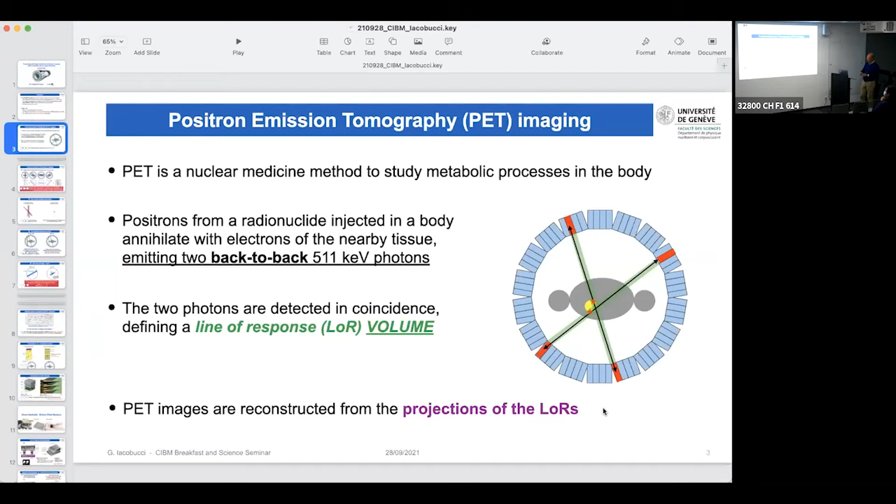So the images on the PET are reconstructed by the projections of the line of response. So this is how it works. You take all the lines of response that go in one direction, you make a projection, then you change this direction, you make all the projections, you superimpose all of them, and you see the image. You can see there is a darker spot there. Like this, it's easy to understand. But if you have many spots that you want to image, of course, everything will be very complicated.

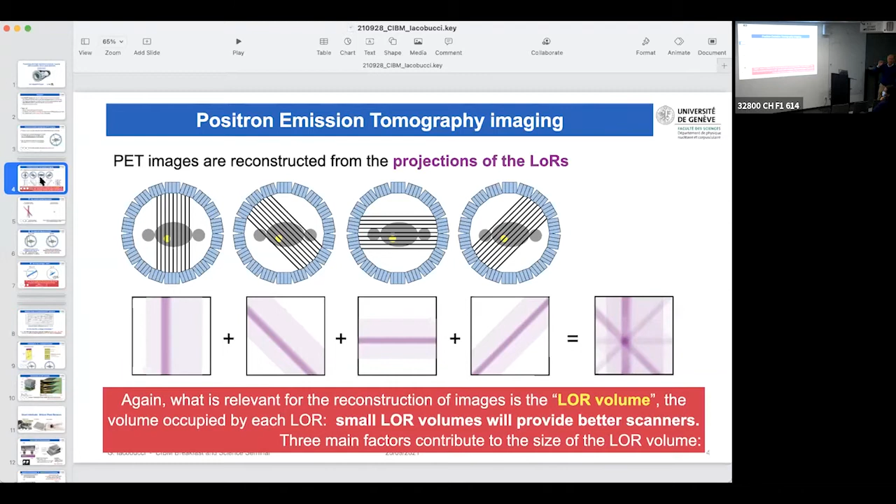There are several factors that contribute to the volume of the line of response, and I will concentrate on three of them. First of all is the detector spatial resolution. So these are movies. I don't know if you can see them. Let's see. Yes. I'm sorry about the latency of the network. I don't know what to do with it.

The idea that I had in making these movies is you see on the left two sources, one emitting two lines of response in red, and the second source that emits the two lines of response in blue. If the granularity of your detector, the size of your detector, is large, you will not only see where they cross, but they will also cross somewhere else. Even if you take all the projections in space, they will cross somewhere else, which means that you will have a lot of ghost images, a lot of artifacts. And there is not much you can do with it.

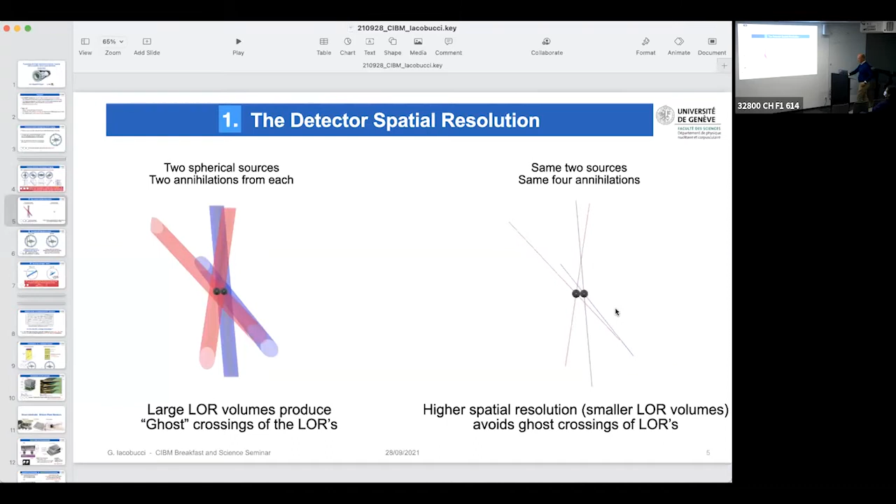On the other hand, if your line of response is thin as a hair, 100 microns, then they will touch only in the points where the emission happened. So this is the first thing, to have a very high resolution. Second thing is what we call the depth of interaction.

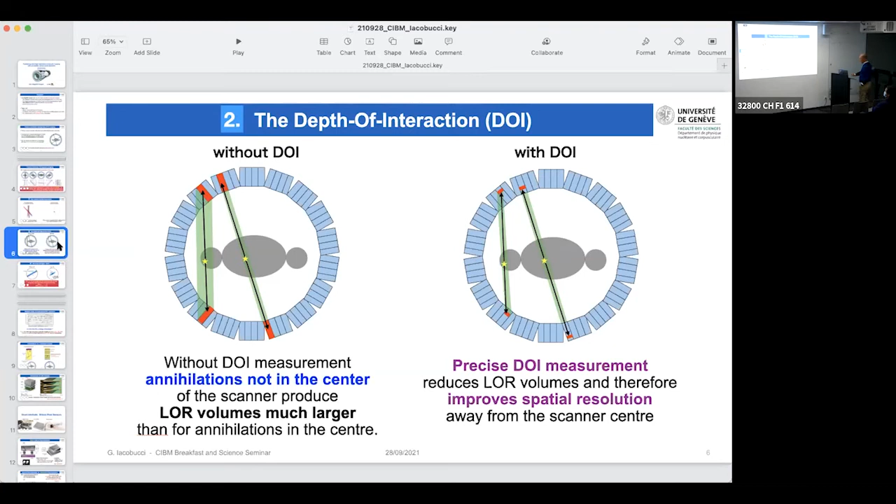Third thing that everybody knows is the time of flight. Time of flight does the same thing. You measure the arrival time on the top and on the bottom detector. You do the difference, and because of this difference in time of flight, you know with a certain precision where the annihilation happens along the line of response of the two photons. This is another way to restrict the volume of the line of response.

Now, my question is: is this the time for a change of paradigm? Can we do something that is drastically different from what is done so far? Of course, PET scanners work very well. Over 40 years, they evolved a lot. They are much, much better than before. But the method is always the same. These are crystals. The photon arrives, you have scintillation light, you measure that. You can do a lot with it.

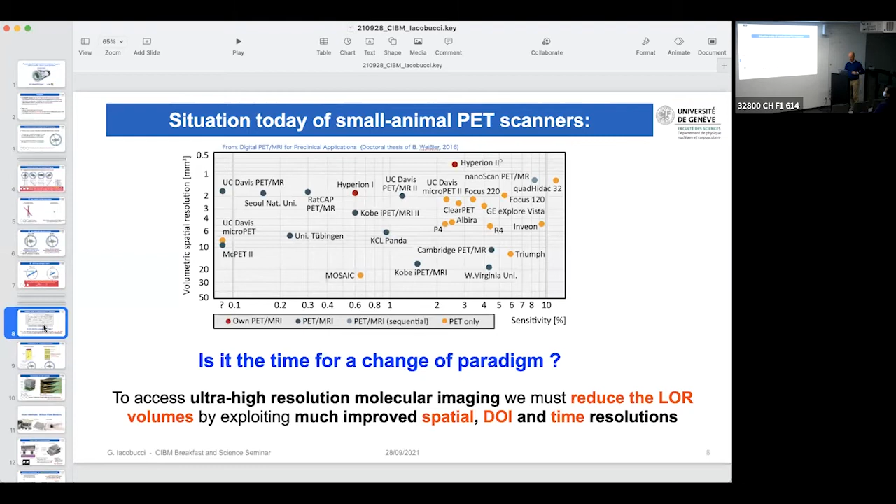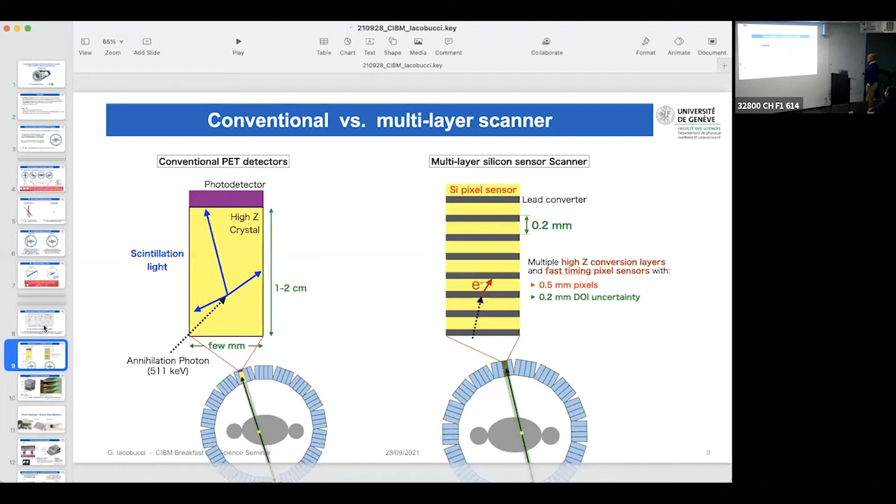So I changed the slide, but I don't see it on the screen. Here it is.

So this is the idea, as you see here on the right. You have a photon that will traverse a multi-layer of, let's say, 60 silicon detectors with a pixel pitch of 100 microns, extremely precise in the transversal plane, extremely precise in the longitudinal direction of the photon. So the depth of interaction we can measure very, very well. And this scanner should not suffer worse resolution on the sides when you are away from the center of the scanner. This is the limit of DOI measurement.

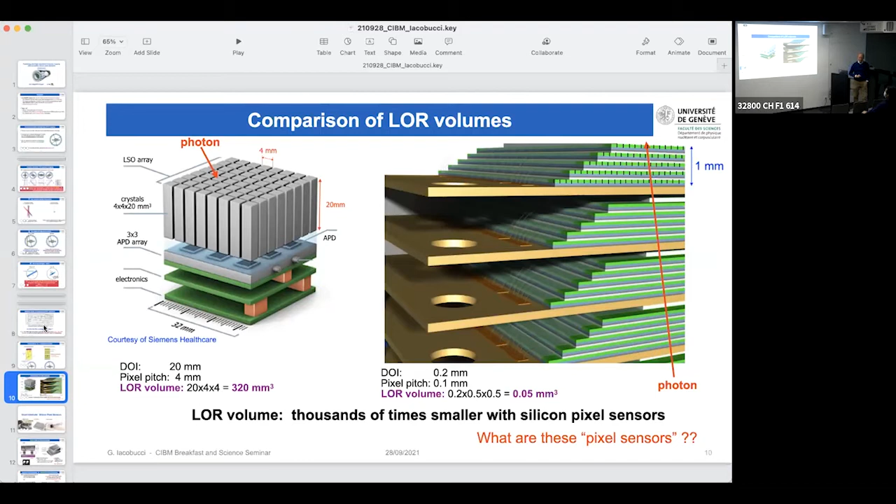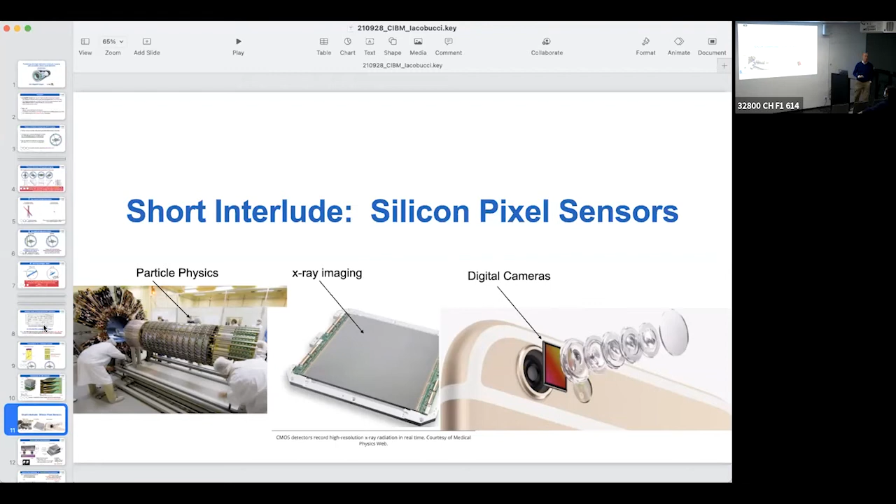You use them with your mobile phone. They are inside any camera and mobile phone. Before, CCDs were used, which were this kind of detector. Now we use CMOS pixel detectors, exactly what we are going to discuss today. So there are essentially two types of them. The first one, sorry, there are animations here, but it doesn't matter, we do it without animation. What do we call a hybrid silicon detector? What is a hybrid silicon detector?

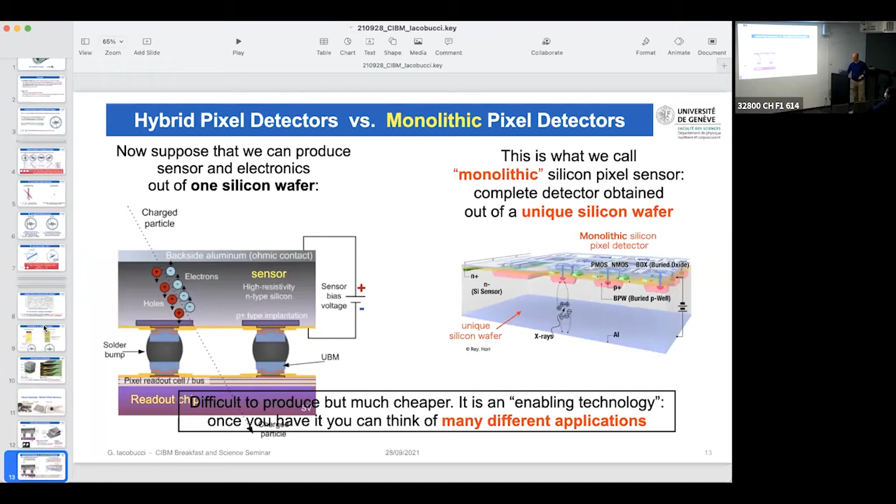Okay, so in Geneva, there is a tradition that I found when I arrived 10 years ago, a tradition with silicon detectors. There was already a very nice clean room with equipment. When I arrived in Geneva, I knew nothing about silicon detectors. I said, this is very nice, this is going in my new department. I do not want to cancel everything that has been done for 15 years before me. I want to continue that. So I continued the tradition in Geneva, but I wanted to innovate a lot.

So as soon as I felt confident, I started R&D projects on monolithic, because before there were only hybrids; monolithic did not exist. With other colleagues, we started to discuss this. The aim of the R&D that I launched in Geneva 6 years ago was first to develop and produce monolithic pixel detectors, but in particular to achieve a time resolution well below 1 nanosecond. The monolithic pixel chips used in ATLAS and CMS have a resolution of, let's say, 5 nanoseconds. I said we should get 50 times better than that, at least. So my goal was 100 picoseconds. As I will show you, we managed to do much better than that.

So with this in mind, we launched the first project, an SNF Sinergia between us, the HUG, and the University of Bern. The colleagues were Michele Weber from Bern and Osman Ratib from the HUG, whom I'm sure several of you know. This was the team at the time.

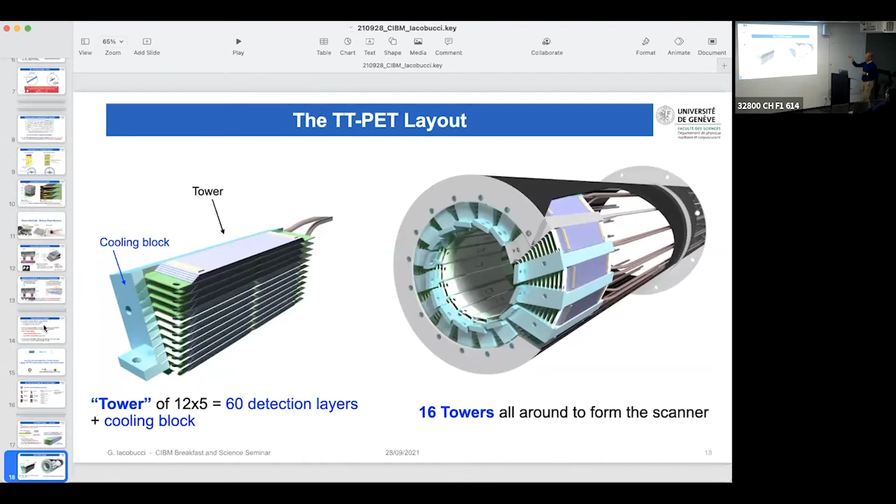Then what we do, these are wedges. We make 16 of them. We put them all around the small animal. And you see on the right what we want to achieve. This is the idea of the scanner.

Now, the performance of this. I'm still talking about the old Sinergia project, not the one that we have now active with Martin and Michael. This is the old Sinergia project that I'm illustrating to you because the principle more or less is the same.

So the performance of that, we have simulated our scanner that we call the thin time-of-flight PET scanner or TT PET scanner. We simulated it and the phantoms in Geant4 that allows a very detailed multi-particle physics, we call a full simulation of the processes and the detector. And we have studied the sensitivity, the coincidence rate, the spatial resolution, the background contamination, according to the NEMA standards. And I want to show very briefly this to you.

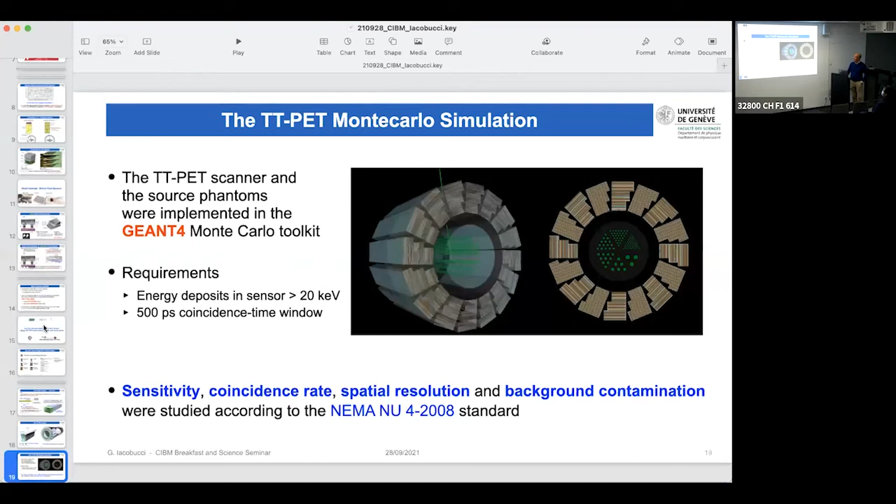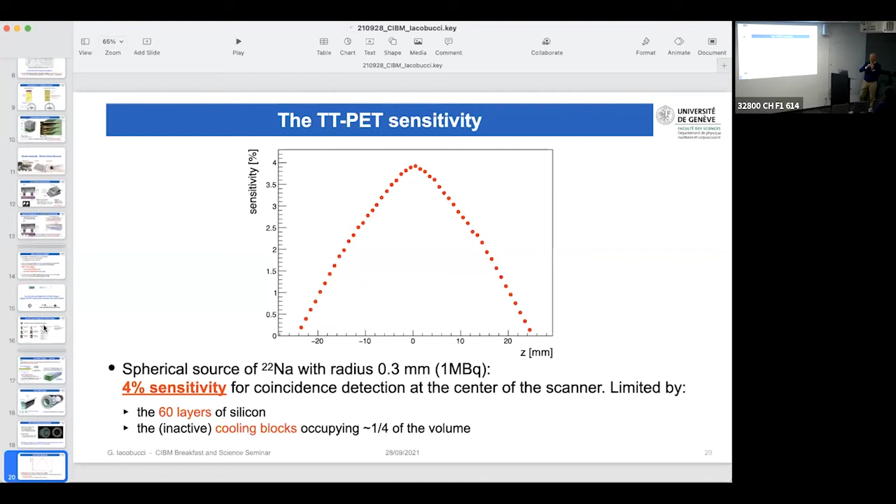So first of all, new slide. First of all, is the sensitivity. Here it is. So at the center of the scanner, according to the NEMA prescriptions, we measure 4% sensitivity, which is not bad. This is limited by the fact that we have 60 layers. If we will put 100 layers, we will have more, of course, and so on. And it's also limited by these cooling blocks that are in the inactive material, so they create regions where we are unable to measure.

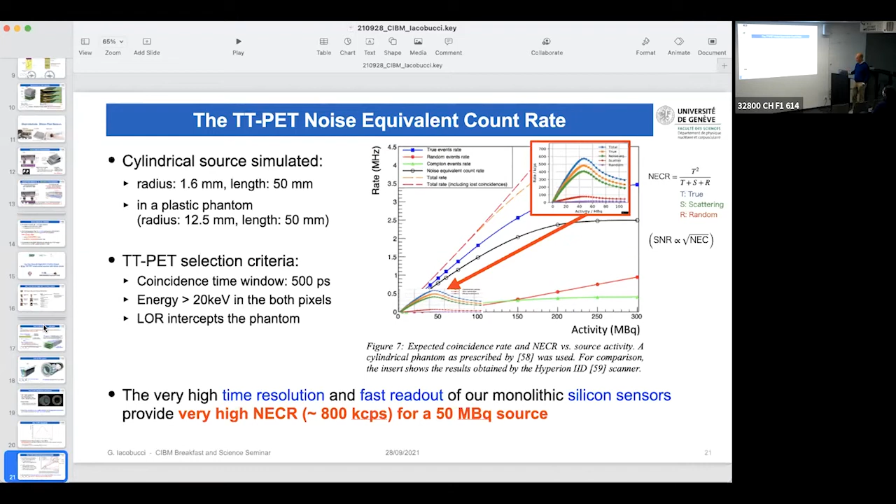Why this? Because silicon sensors are very fast. Our readout electronics is very fast. So this is why we can really work at very high rate, very high activity with high efficiency. Then we made the reconstruction.

You see on the left, the truth, the Monte Carlo truth, simulated the Derenzo phantom. Note the rod diameters. We go here down to 0.5 millimeter. Typically, the smaller rods that you see in the Derenzo phantom are 2 millimeters, in some cases 1 millimeter. Here it's 0.5. So we made a first reconstruction, non-iterative filtered back projection, and you see that without the time of flight information and with the time of flight information, we see enough. We see essentially all the structures, also 0.5.

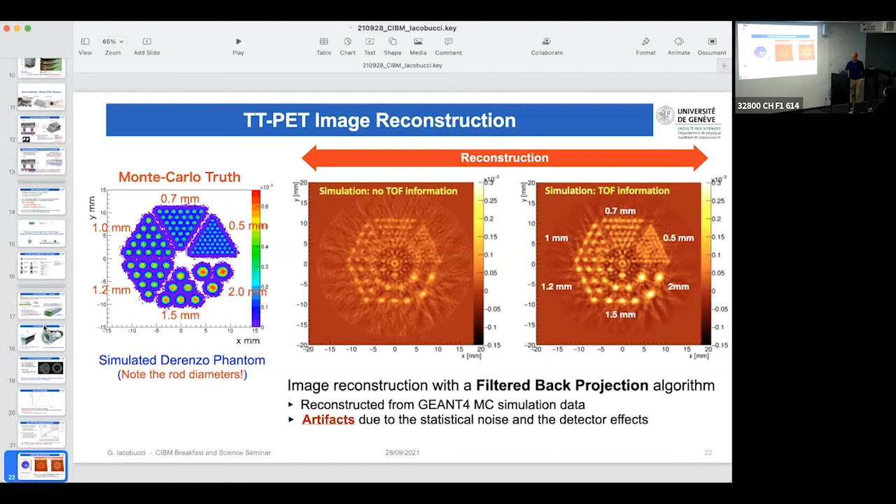But as you know, filtered back projection is non-iterative. It creates artifacts that you see here at the center of these images. So we were not happy. And with Emanuele Piccini, who is now working here at EPFL, and Daiki Ayakawa, my PhD student, they did set up an iterative algorithm.

Now, in this table, you see the results for the point spread function. You see several very interesting things. You see that the resolution, full width at half maximum in millimeters in the radial, tangential, and axial direction, is essentially half a millimeter, which is already very good. It's already a big jump with respect to what is achieved by conventional scanners.

And the other thing that you should notice is that when you move away from the center of the scanner, you see X position 0, 5, 10, 15 millimeters, it does not change. That is exactly what I told you is the virtue of very precise depth of interaction. So we have many layers, we can measure depth of interaction very well. So our resolution does not degrade when we move away from the center of the scanner, as we wanted.

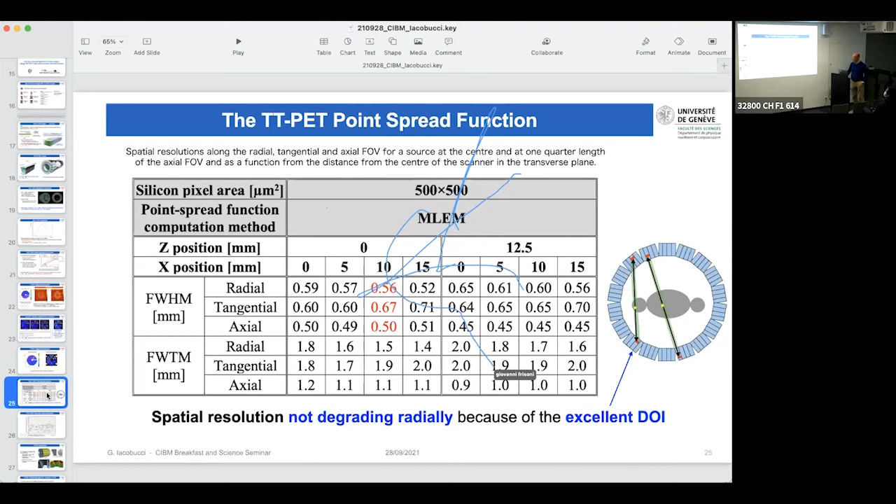Giovanni Frisoni is writing on the screen. Good morning, Giovanni. Apologies.

Okay, where is our scanner now in the diagram that I showed you before, the volumetric spatial resolution versus the sensitivity? It is here. As you see, we have 4% sensitivity, but we have a volumetric resolution that is already 5-6 times better than the best conventional small animal PET scanner. So this is already very satisfactory.

So I see that people continue to write on the screen.

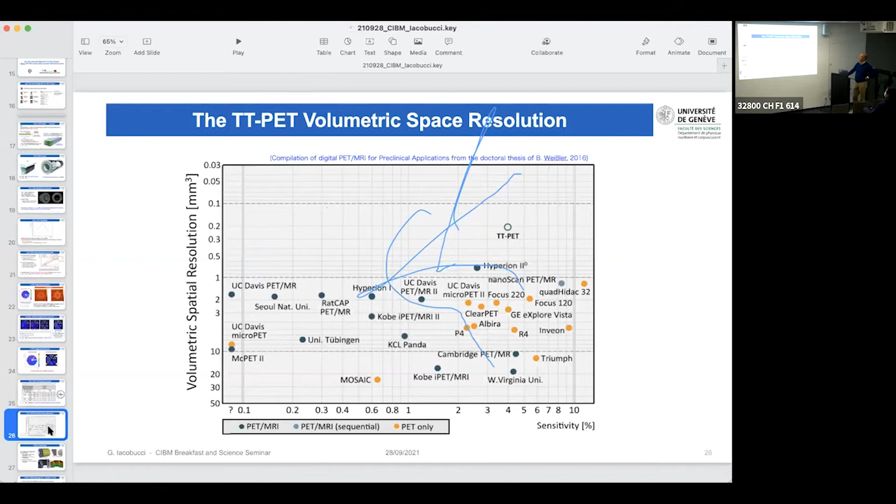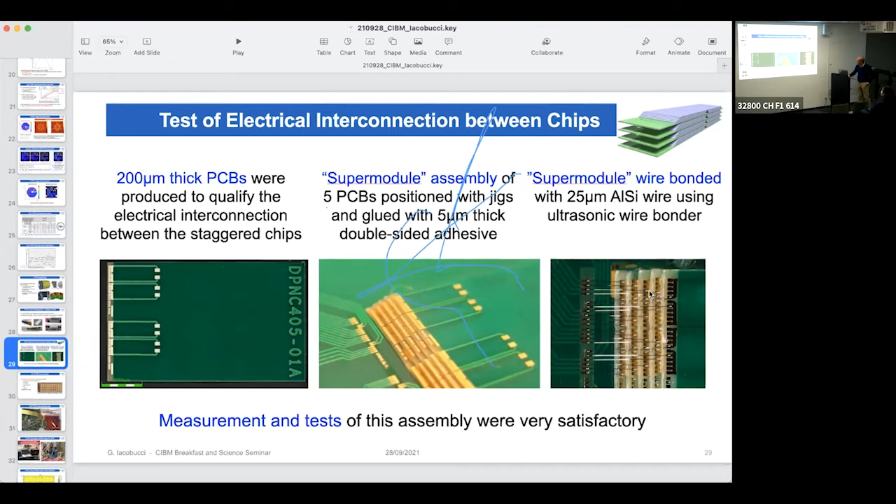Okay, so we made all the engineering. I think I'm late, so I will go very quickly on the engineering. So we made all the engineering of the scanner. We tested everything. I just show you the image. You see, we made a test of this staggered wire bonding. I'm not sure you can see here, but there are the wire bonds on this test sample here on the right. And then we made the prototype chip.

The prototype chip had 3 matrices of 3 times 10 pixels with a pitch of 500 microns. We decided not to go with very small pixels because of power. The more pixels you have, the more amplifiers you need, the more power you need. We had a budget of 300 watts for the entire scanner, so we had to stop at this size.

Why this? Because we wanted to exploit time of flight. Our electronics we developed in Geneva is very, very fast, so we can run a detector at 30 picoseconds time resolution. We wanted to use this. But if you want a very high time resolution, you also need a lot of power, which means that you cannot allow yourself too small pixels, because it would be too many channels. Okay?

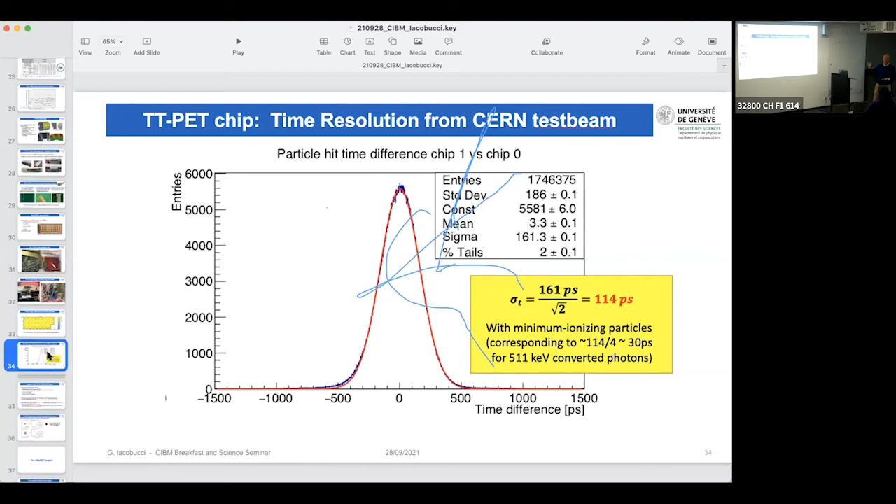That means that in the case of 511 keV photons that you want to measure in the PET scanner, the electrons that you convert out of this photon at that energy will produce much higher ionization. There's about a factor of 4. So the goal was achieved. Okay? So we were very happy about this.

So this was then the basis of the second Sinergia project that we launched and got approved, Martin, Michael, and myself. So we used all this. We have demonstrated we can do it. Then we sent this second funding request to SNF, in which we show that we can do much better than this. I will show you why. Because what we realized is that if we give up the 30 picosecond time resolution, I go directly to the results that I want to show you.

At the beginning we were thinking, well, we know that the mean free path of the positron in the tissue will compromise this. We said, well, yes and no. It depends on the type of radionuclide that you use. If you use oxygen 15, for example, the full width half maximum of the mean free path of the positron in the tissue is half a millimeter. But if you take FDG, it's 100 microns. And as you know, 95% of the exams in hospitals are done with FDG, so it makes sense because the mean free path is very short. So it makes sense to make this very precise detector.

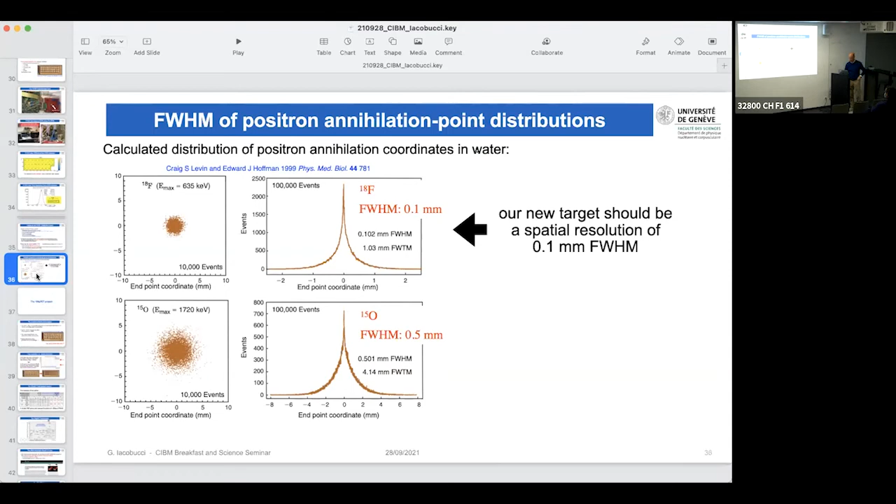So our idea now, the proposal to SNF, has been the following. Let's drop the idea to make a time of flight scanner, okay? On the other hand, let's point everything on the spatial resolution so that our lines of response are very thin, 100 microns, a few hundred microns, like a hair. This should help us very much in having high precision and the highest possible contrast, because we will have less accidental ghost superpositions of these lines of response.

Looking back again to this plot, this compilation of small animal PET scanners, volumetric spatial resolution as a function of the sensitivity. This is where our old project was, but if we make 100 micron pixels, giving up the time of flight measurement, this is where we will be. We will have the same sensitivity, but much better volumetric resolution, more than one order of magnitude better. And SNF liked that, and they funded our second Sinergia project.

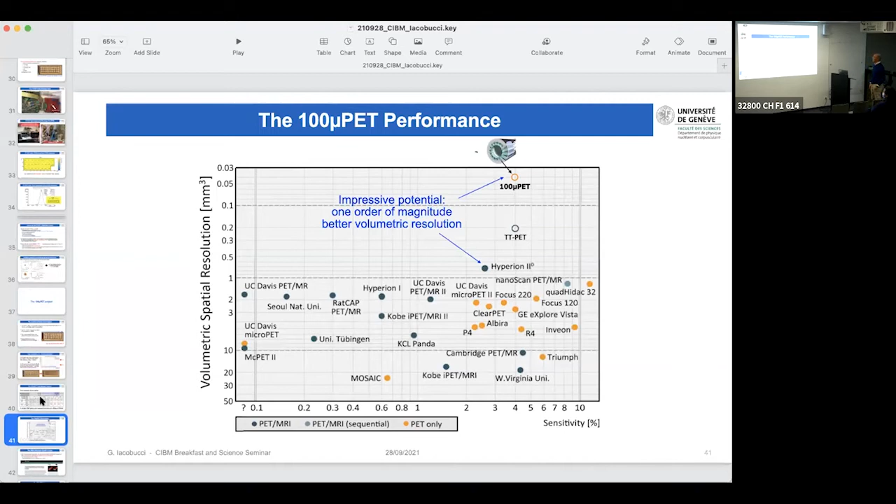The first one is to build this ultra-high resolution PET scanner. The second is very interesting, because the idea is to make a virtual ultra-high resolution mouse via autoradiography, and then digitize that. Then, of course, the image reconstruction by the group of Michael, which will be very challenging because there will be 10^15 lines of response. But Michael, Paul, and the group already have many ideas that we discussed. And at the end, the molecular imaging, the measurements that we will do on the APOE mice at the Hôpital Cantonal in Geneva.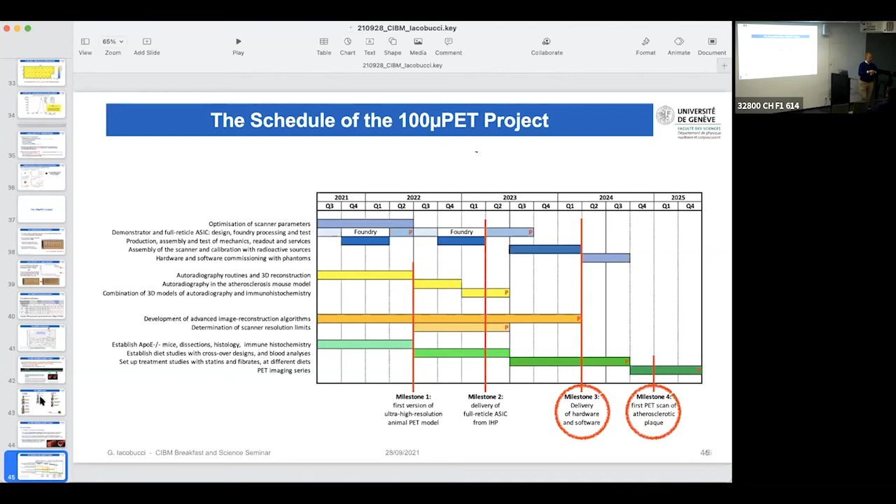So 2024 is the most important milestone. So again, this I do not want to show, yeah. But since then, if I have time, do I? No problem, I take my time, okay.

Because this is the project that we submitted to SNF and was approved, so we should be already very happy. But given the fact that we did not start the project immediately, we have been continuing thinking, brainstorming, and we had a lot of new ideas how to improve the scanner even further. So the design that I showed you has a problem. Well, in reality, it has 2 problems.

First of all, the cooling blocks are needed to keep the controlled temperature of the silicon, otherwise, as I said, it's like a lamp, it will heat up. We need these cooling blocks, but as you see, they are in the sensitive volume of the scanner. So this creates an inefficiency. And in PET scanners, inefficiency is a big problem because you need to detect 2 photons. They occupy about 1/4 of the volume.

If you have an inefficiency of 1/4, so you have 75% efficiency, this is for 1 photon, but you have to measure 2 photons. It means that you have to multiply these 2 efficiencies. 75% times 75% will be the efficiency of the scanner. So the efficiency of this design will be 56% of the full efficiency. Okay, so we would lose more or less half of the pairs of photons.

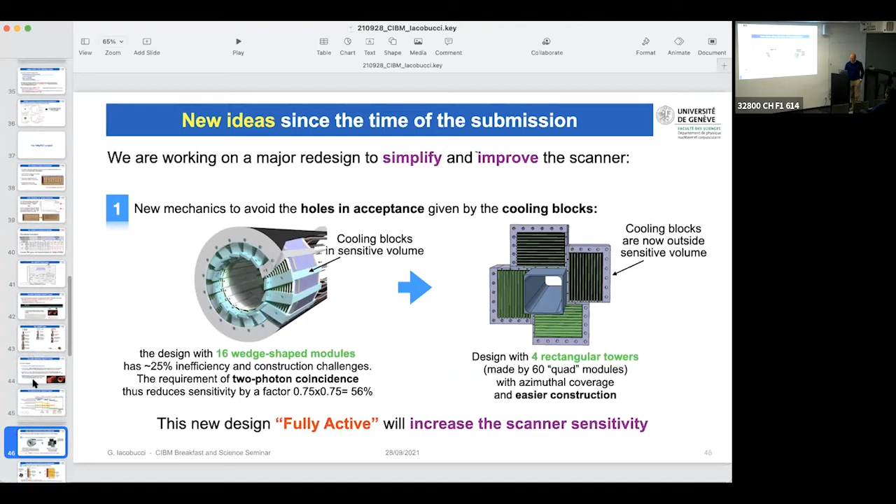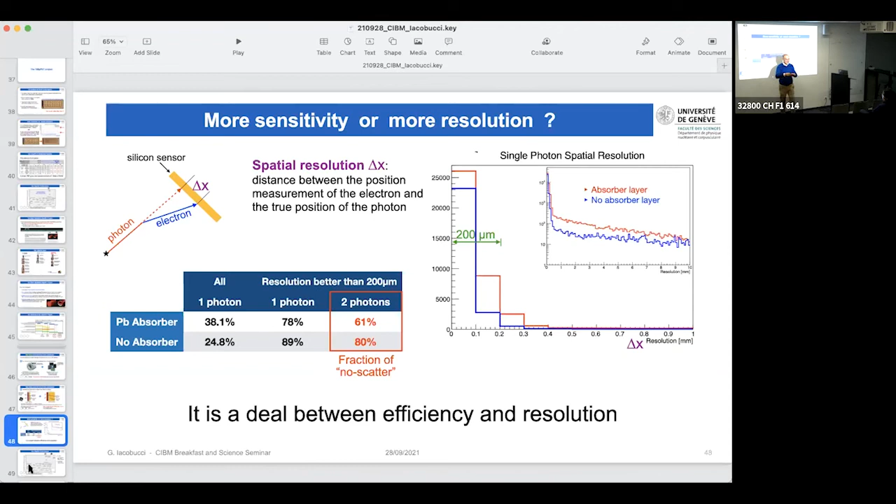So what you see here is the resolution in millimeter. So you have a photon that does, for example, a Compton here, or photoelectric, and then you have the electron that goes out of this Compton event or photoelectric event with a certain angle. So what is the error that we make in the measurement of the position? So how much is this delta X? Okay, so look at the plot here. These are 100 microns, these are 200 microns. So most of them will be within 200 microns.

So very precise. Okay, here the mean free path of the positron in the body is not considered. So we have to add that. That will be another 100 microns to put in quadrature. But as you see, this will be extremely precise. And if we look at this plot in log scale, but you already see it here, you can see that no absorber means the Compton. The Compton have a tail in the distribution of the resolution that is smaller. So they are more precise intrinsically.

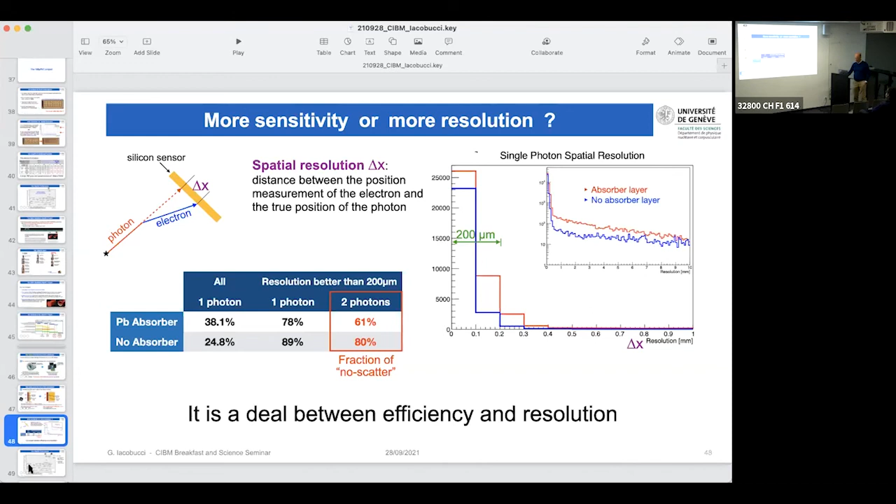So this will be up to the group of Michael and the group of Martin, together, of course, with us, to determine which direction we want to go. So this will be a matter of study in the near future. Now, I can stop here. I can move forward. I move forward because there is something more I want to tell you.

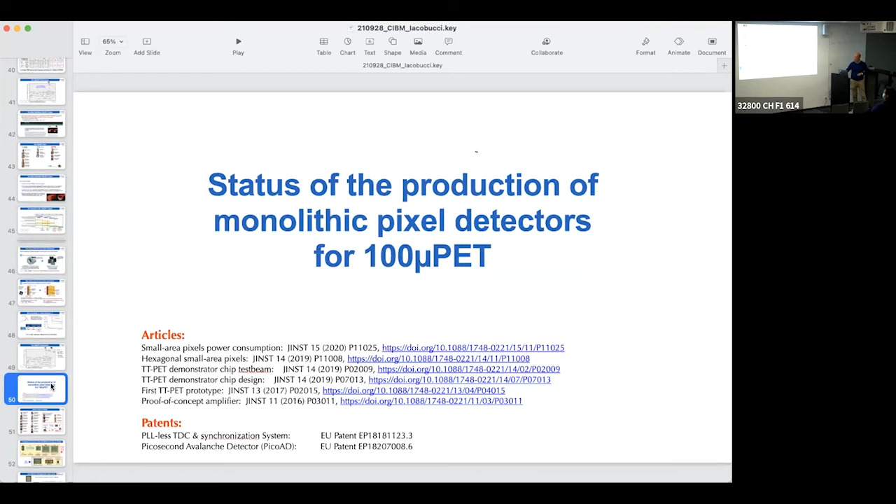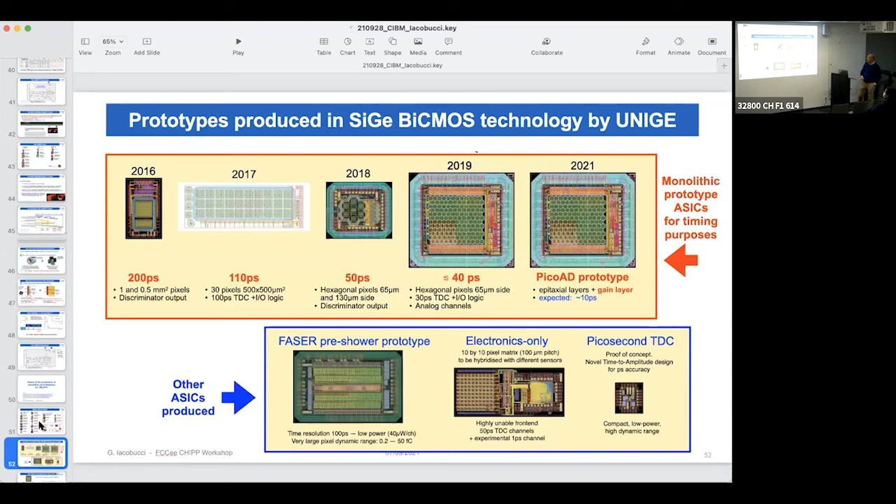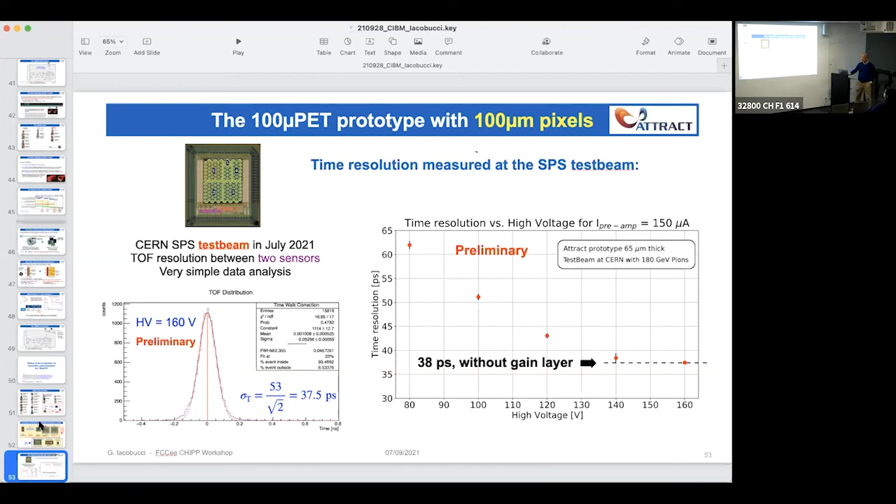First of all, if we run our electronics at full power, we obtain 38 picoseconds time resolution, which is really excellent. For sensors of this type, without what we call a gain layer, I will explain this to you in a moment, the best was about 150 picoseconds. We managed to have better than 40, which is great. And then efficiency, we have 99.9% efficiency. So they are fully efficient. I don't go into the details of this, too complicated, but this is the main point. 99.9% efficiency, 38 picoseconds. So the chip seems to work very well. I'm delighted about this. Now, last thing, then I swear I will stop.

But so the 100μPET scanner is already a supercar, as you see. But why not dream of speed? I mean, Mercedes wins also in Formula One. Why not add the time of flight again? Can we do that? We already do 38 picoseconds. Can we do even better than that?

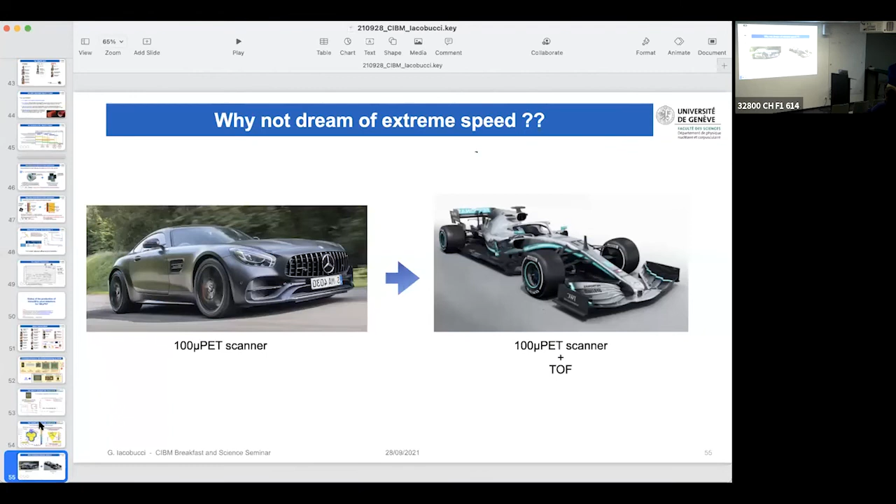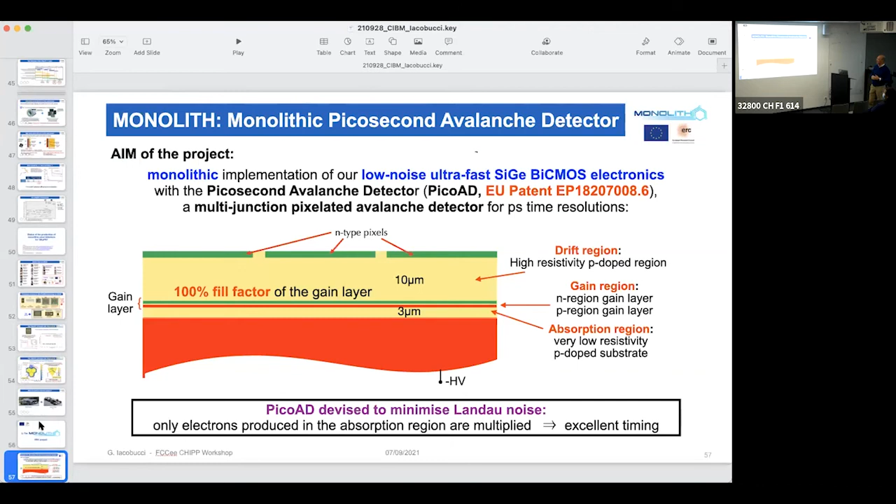Well, here I have an ERC project that I call the MONOLITH that is exactly to do that, to implement a gain layer. I don't go into the details. I mean, to implement a gain layer in our sensors to increase the time resolution. To what? I show you what the simulation told us and convinced the ERC panel to fund this research project. We could have sensors that go up to 2 picoseconds.

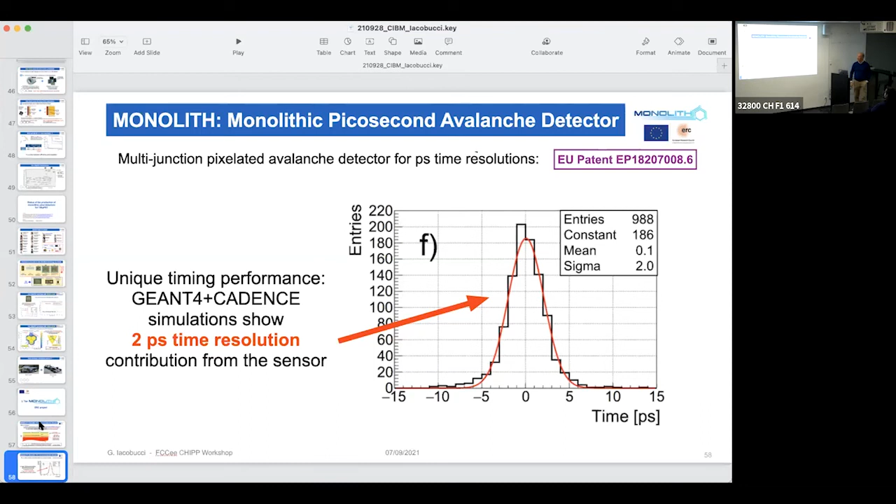So I would foresee in the future that, if everything is fine with 100μPET and we achieve this incredible PET scanner of new generation with silicon, we could also have a second step in which we include also the timing, which will make the life of Paul, Michael, and the others much easier, because if you have also timing at this level, the 3D points that you have to put in the space will be much easier to reconstruct. So I think I stop here because it was already too long, maybe, I'm afraid.

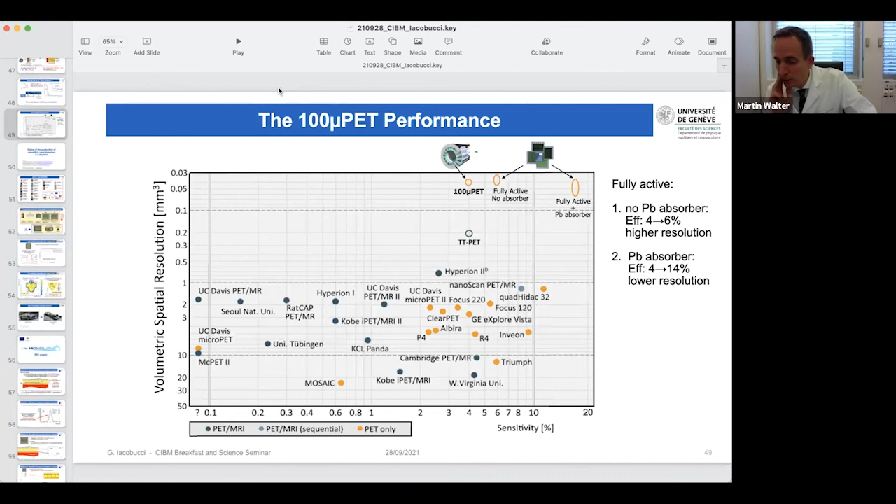But with the new design, increasing the active silicon from 50 microns to 250 microns, we can get up here. So as you see, we can do better than the best small animal PET scanner done with crystals. Of course, I'm not giving you the number per photon; I'm looking at the system in answering you. Okay. Well, thank you to the colleague for this interesting question. Thank you, Pepe, for answering the questions. Are there other questions?

Yes, Bernard? Do I have to talk in a microphone? Or... No, it's fine. Okay, very good.

Well, I actually had a question. Sooner or later, when you push the spatial resolution of the reconstruction you're building with your extremely nice sensors, you reach the physical limits of the positron annihilation itself. So the free diffusion of the positron, but also the non-collinearity of the photons which are emitted, which is more of a problem for human scanners than small animal scanners. Yeah. So at some point, the intrinsic spatial resolution will be limited by that phenomenon.

I was wondering whether another advantage of your extremely sensitive sensors, especially for human application, could be that you could run PET scanners with much lower injected doses to the patients, because the invasiveness of PET is still limited by the dose applied to the patient, which does not allow you to make a PET scan every week, for example. You could not run a PET scan on someone every week? But would that be another approach or another selling point for the technology?

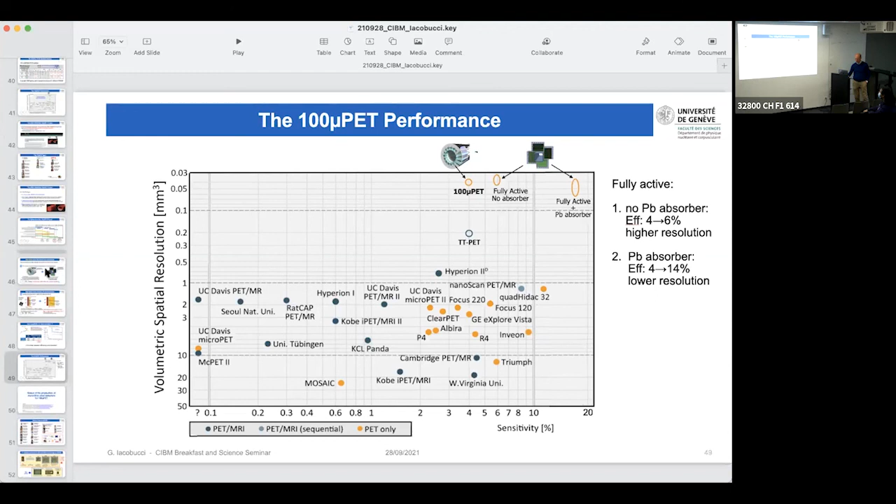So there are many questions there, one at a time. What's the first question? So the question would be that at some point you cannot fight the spatial resolution much further than the intrinsic positron range. Yes. To this, I can show you the table. Let me see where it is.

So this answers your first question, which is when you get to the limit that comes from the mean free path of the positrons in the body. So you see, 300 we can do with a trivial reconstruction. Then, as I said, Michael and his group certainly will do better than this. So this is the first.

The second question, if I remember correctly, you said in a human scanner you have a lot of material. The body is big, so you have the Compton effects in the body, what are called the scatters. Well, that's one thing I meant, and also the fact that the photons are not necessarily exactly at 180 degrees, because there is still a bit of kinetic energy.

Yeah. But this is part of the art of bioimaging. Of course, there will be a reconstruction code, filtering, probably very complicated, that will take care of all this. This is part of the game. I don't see it as a negative point. I just think that, I understand. Since you have pushed the detection to the best, would it be useful then to be able to decrease the dose you need for a PET scanner?

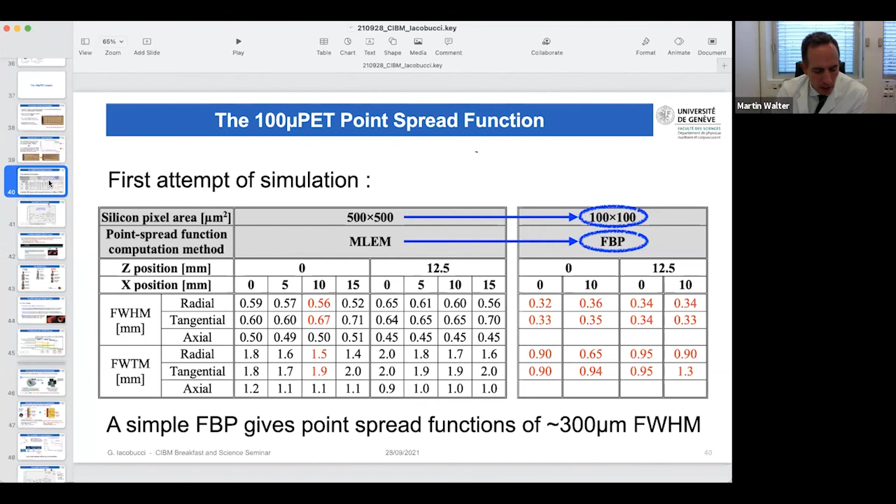So from the point of view of the reconstruction, there is a lot to be understood, because, as Michael and Paul will tell you, it's a completely new system. It's a completely different paradigm. In the past, and also over the last 6 months, we have been brainstorming a lot and having new ideas that seem to be very interesting. It will be the same with the reconstruction.

We have to produce in the project the simulated annihilations for them. We have not yet done it, so it's not their fault, it's our fault. We have been a bit slow there. I'm sure that when they have the simulation of the events with the scanner and all the material, they will do amazing things. Very impressive. Thank you very much. Thank you for the question.